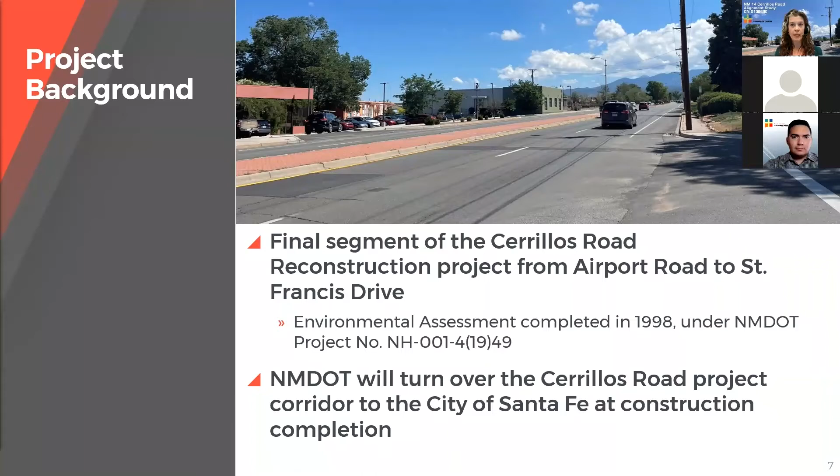This portion of Cerrillos between St. Michael's and St. Francis is actually the final segment of the Cerrillos Road reconstruction effort from Airport Road to St. Francis Drive. The NMDOT completed an environmental assessment in 1998 for these improvements, and construction of the adjacent areas is already complete. Similar to those other segments, the NMDOT will hand off this segment of Cerrillos to the City of Santa Fe at the end of construction.

Next, I'm going to talk a little bit about the purpose and need of the project. The purpose and need is to address deficiencies by improving traffic operations and safety. The project is seeking to update the corridor to meet current design standards, as well as enhance ADA accommodations and multimodal accessibility. The existing four-lane divided roadway will remain, and transit stops and multimodal access and connectivity will be considered.

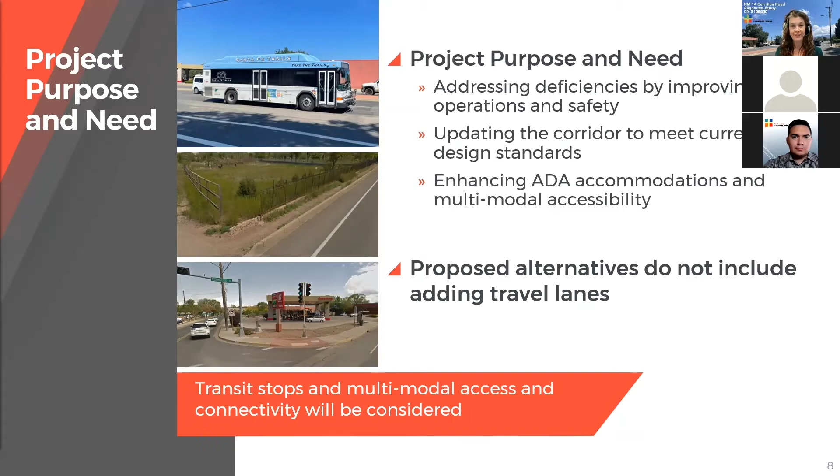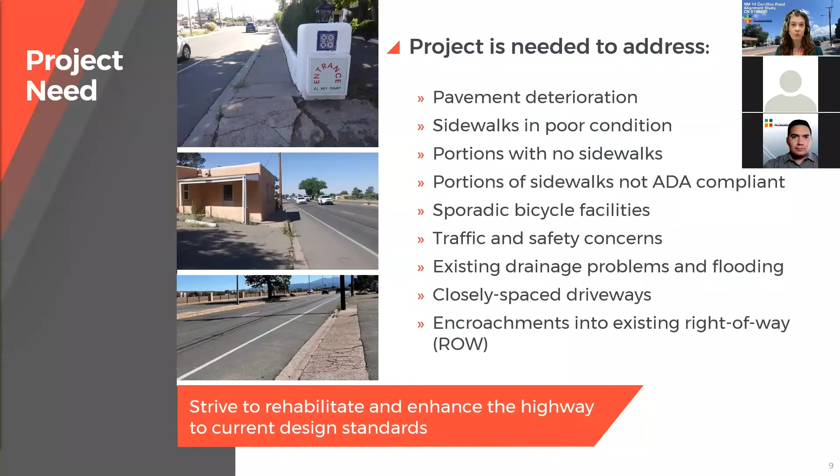The project is needed to address aging and outdated infrastructure. It will enhance and improve the highway so it complies with current design standards. Some of the elements needing to be addressed include pavement deterioration, sidewalks in poor condition, portions with no sidewalks, portions of sidewalks not ADA compliant, sporadic bike facilities, traffic and safety concerns, existing drainage problems and flooding. There are closely spaced driveways, and there are also encroachments into the existing right of way.

Next, I'm going to talk a little bit about the NMDOT's process for developing projects and where we're at in the process for the Cerrillos Road project. Currently, we're in the study phase of this project. This is called Phase 1AB by the New Mexico Department of Transportation. During the 1AB study, we identify what improvements are needed and why, and we evaluate potential options that could be feasible to carry through to design and eventual construction.

After the prior public and business owner meetings held in 2021 in coordination with our stakeholders, we incorporated that input received to advance the study and refine the improvement recommendations. As we are nearing the end of the study phase, which is what we're doing now, we're coming back to you today to present the public with our findings and recommendations. Your input is key to helping us advance the project into environmental studies and preliminary engineering design.

As part of the process, we've been coordinating with our key agencies and stakeholders that manage resources and lands in and around the corridor. This includes City of Santa Fe Indian School, the School for the Deaf, the Santa Fe MPO, and Fairview Cemetery. Next, I'd like to hand it over to Terry Ward, WSP Project Manager, who will discuss our public meeting and stakeholder outreach efforts to date and summarize the input that we've received.

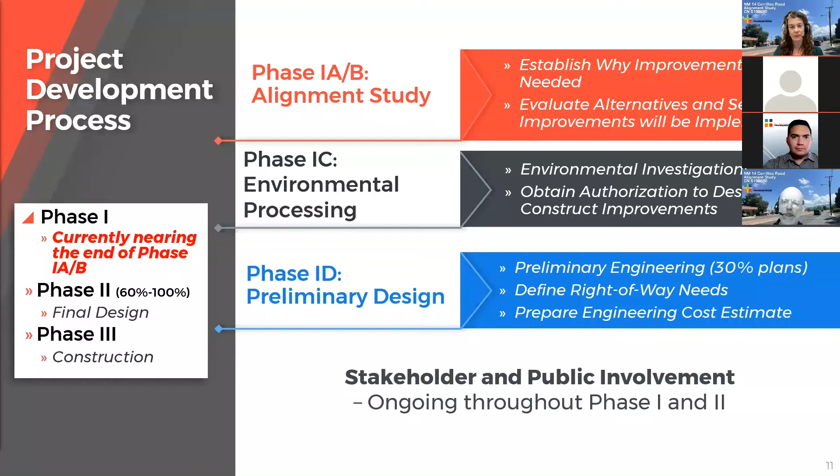Thanks, Jennifer. As Jennifer mentioned, we'd like to talk about the public meeting that we had and some of the stakeholder outreach and efforts that we've received.

Last year in July, we held our Phase 1A, or Alternatives Development, public meeting—our first public meeting. At that time, we had developed a suite of 10 typical sections. In the meeting, we presented that we had screened those 10 typical sections down to 2: one with a 4-foot bike lane and one with a 5-foot bike lane. All of those previous materials are available on our project website that Jennifer featured.

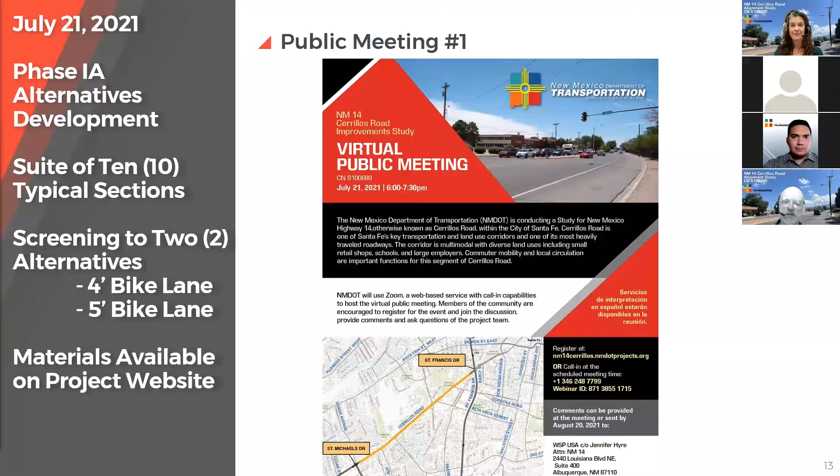For the public meeting, we featured a MetroQuest survey platform. We got great participation—263 people participated. We received 659 comments with 733 data points, a real great portfolio of comments. We also received additional public comments from phone calls and emails. We shared all the comments with New Mexico DOT, City of Santa Fe, and Santa Fe MPO staff, and we developed an overview, or comment summary report, from all of the responses, which we'll feature next.

The first category is improved bike lanes and paths. One recommendation was that during the Phase 1B detailed evaluation efforts, we provide more weighting to the 5-foot bike lane alternative. What's happened is early in Phase 1B, the 4-foot bike lane alternative was eliminated in close coordination with the city and the MPO. I'll talk more about that later.

Another recommendation was to consider green markings for bike lanes. As a team, we've discussed that green markings are not currently planned. However, wider pavement markings for the lane line between the driving lane and the roadway shoulder bike lane will be reviewed in our next phase, Phase 1D, of the project.

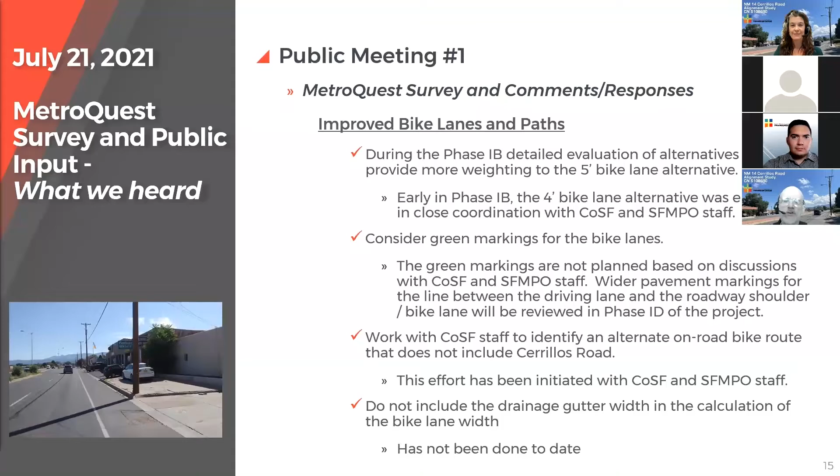Another recommendation was to work with City of Santa Fe staff to identify an alternate on-road bike route that does not include Cerrillos Road for bike movements in this area of the community, and that effort has been initiated with the city and the MPO. Finally, a recommendation to not include the drainage gutter width in calculation of the bike lane width—we have not done that to date.

Another category is improved traffic safety. There was a recommendation to provide more uniform corridor overhead lighting—we'll certainly look at that—and to include overhead lighting at a number of intersections, which will be reviewed as part of our next phase.

Another recommendation was to close the southbound Cerrillos Road turn lane to the New Mexico DOT General Office campus. I'll talk more about that later—we have a concept that actually does that. Another was to implement traffic calming measures such as narrower traffic lanes and landscaping. Those elements are included in our project's typical sections that we've advanced so far.

We reviewed and improved traffic signal timing, which we've done. We'll perform a Railfan traffic signal and access study to determine if a traffic signal is warranted at that location—that's in progress, depending on when traffic conditions allow for updated traffic counts. We'll also implement access management improvements for the businesses across from the Santa Fe Indian School; that's also being looked at as part of the project.

Two recommendations we received a number of comments on that aren't part of the project are to consider red light running cameras in cooperation with the city, and to increase speed enforcement. Those really are not project-specific elements, so we just want to be clear on those, since we did receive a number of comments.

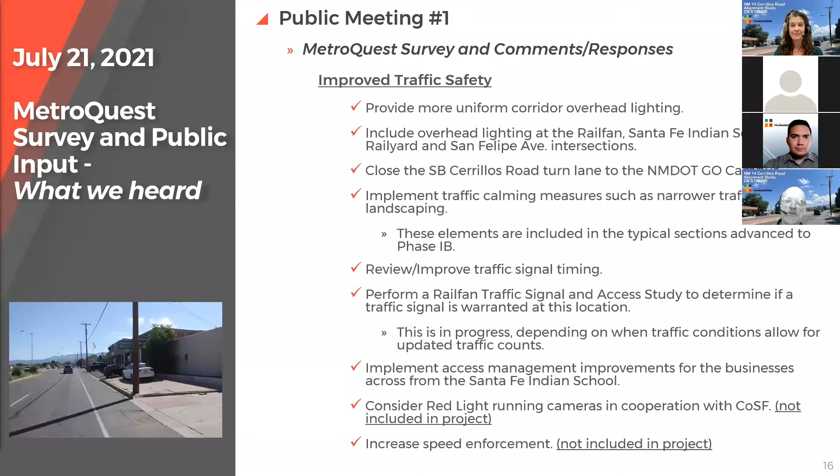Next, traffic flow during construction. We did not receive any recommendations from the responses; however, communications will be key in advance of the construction phase.

Better bike and pedestrian crossings. We received comments to consider crossings of Cerrillos Road at Ashbaugh Park, Railfan, Alta Vista, the Santa Fe Indian School, and other areas where there are long stretches of the Cerrillos corridor without existing crossings. I'll feature those a little bit later in our site-specific improvement recommendations.

Another recommendation was to incorporate planning for a future Railfan Trail underpass as planned by the Santa Fe MPO. We had discussions as a team, and this is not currently included as part of the Cerrillos Road project.

That doesn't mean it can't be done in the future, but just to be clear, it's not included in our current project efforts, though it has been discussed.

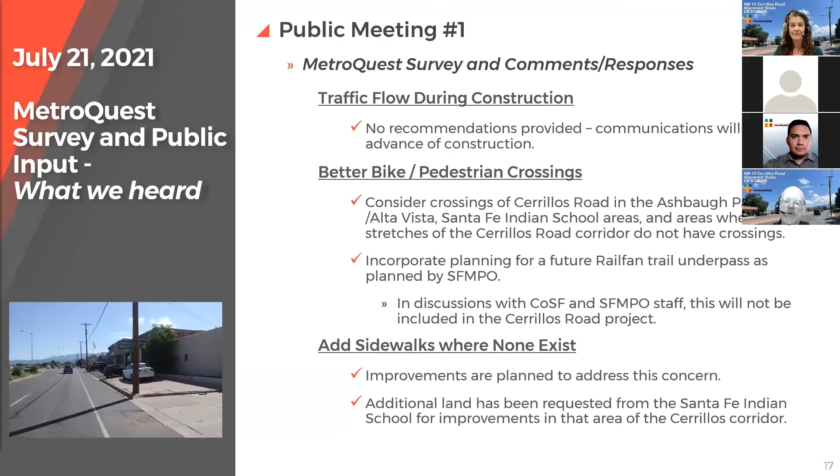Another category is adding sidewalks where none exist. Improvements are planned to address this concern, and additional land has been requested from the Santa Fe Indian School for improvements in that area of the Cerrillos corridor.

Next: how long will construction last? There are no recommendations yet, but again, communication will be very key in terms of the construction phase, the impacts, and the duration.

Another item was removing sidewalk obstructions. Removal of obstructions was recommended and is planned as part of the project - that's power poles, hydrants, and so on. However, those obstructions can remain as long as there's a minimum 4-foot sidewalk clearance. For example, a power pole is no longer an obstruction if there's a 4-foot sidewalk that traverses around it.

The last category in terms of all the great feedback we got was aesthetics. Aesthetics was a low priority in the survey responses, but it remains an area of importance for the project team.

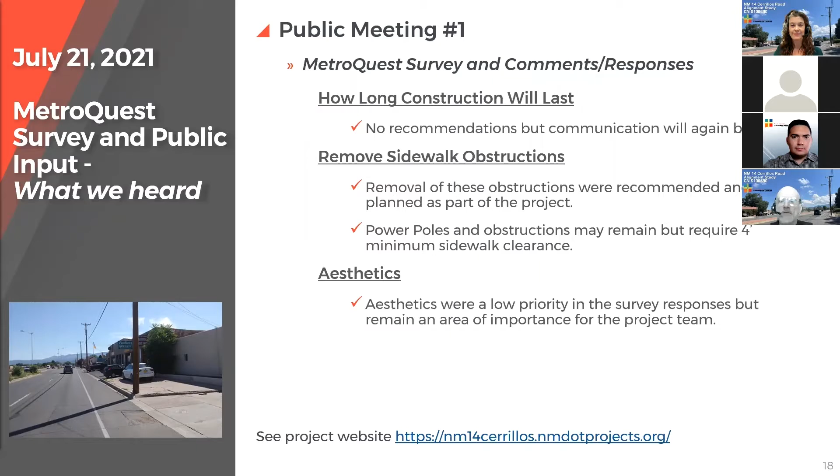So I want to switch gears now to some preliminary recommendations - again, preliminary, not final, preliminary recommendations.

This is option 8, a typical section from our phase 1A. It was presented at the public meeting last year. It's an option that was moved forward. It fits within constrained areas of the corridor, still requires some strips of right-of-way construction, still requires 4-foot sidewalks in some sidewalk-constrained areas, but this makes up the foundation of the recommendations moving forward.

So I want to give some time to talk through this typical section, because everything we show moving forward builds off of this. If I start in the middle of this option 8 typical section, there's a variable 12 to 14 foot median.

14 feet is needed where there's left turn lanes; we can narrow up to 12 in other areas. The driving lanes, the 4 of them, 2 in each direction, have been narrowed to 10.5 feet to gain some width. The bike lane shoulder here is shown as 4 to 5 feet variable. Again, we've dropped the 4-foot shoulder bike lane, and I'll talk more about that in a little bit. There's 2-foot curb and gutter on each side, and then a 5-foot sidewalk.

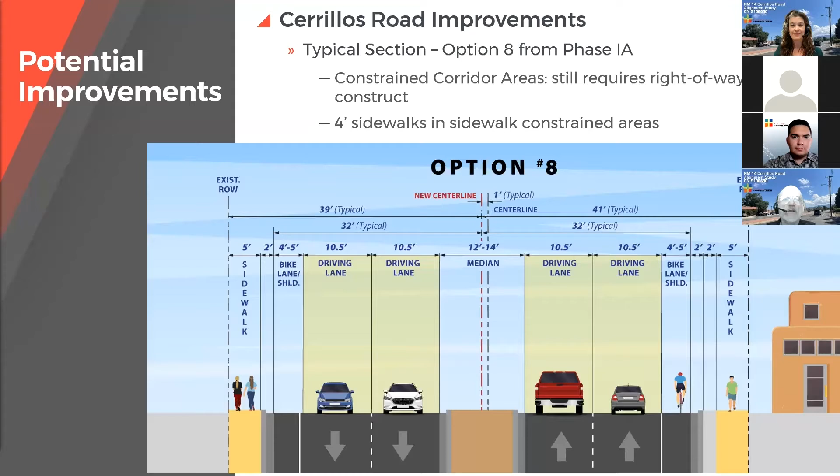Next slide: option 9, then, from phase 1A, we presented where right-of-way may be available. It's the same foundation of the median, driving lanes, and bike lane. It allows, however, where there's some right-of-way availability, a wider sidewalk buffer between the sidewalk and the curbing or the bike lane shoulder. This is where, for example, right-of-way would potentially be available in the Santa Fe Indian School area.

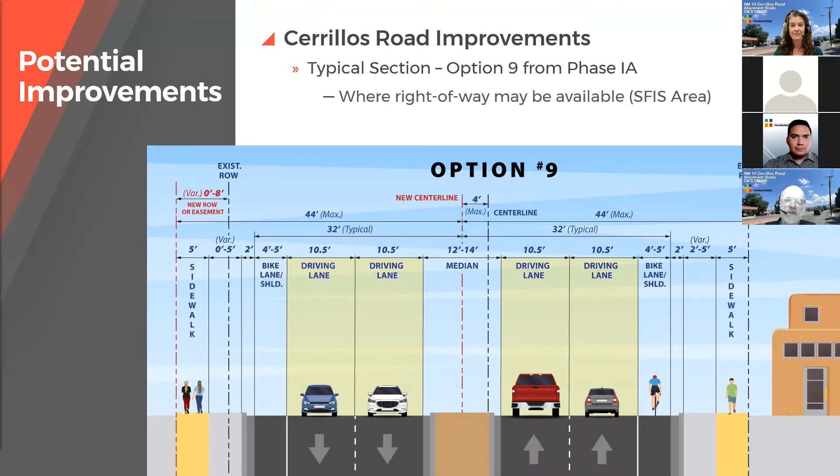So these were the two typical sections from phase 1A that move forward for additional analysis.

So options 8 and 9, which I just presented from phase 1A, were combined into two corridor-wide alternatives with a variable 12 to 14 foot median, 10.5 foot driving lanes, 4 or 5 foot bike lanes/roadway shoulder, 5 foot sidewalks where feasible, 4 foot minimum in constrained areas, and wider sidewalk buffers where right-of-way is available, like for example the Santa Fe Indian School. Those options are on the website from the last public meeting.

We presented what we called an option 8 4-foot bike lane and 5-foot bike lane. Again, those were all materials presented in 1A, the last public meeting, and have been on the website for some time now. Subsequently, a study working group was formed in phase 1B, our detailed analysis phase, to review the phase 1A alternatives and public feedback.

So all of the alternatives that I've talked about, all of this great feedback, we formed a study working group to review it. It included the New Mexico DOT, Department of Transportation, City of Santa Fe, and Santa Fe MPO staff, and we had a series of meetings to really steer or drive the phase 1B efforts.

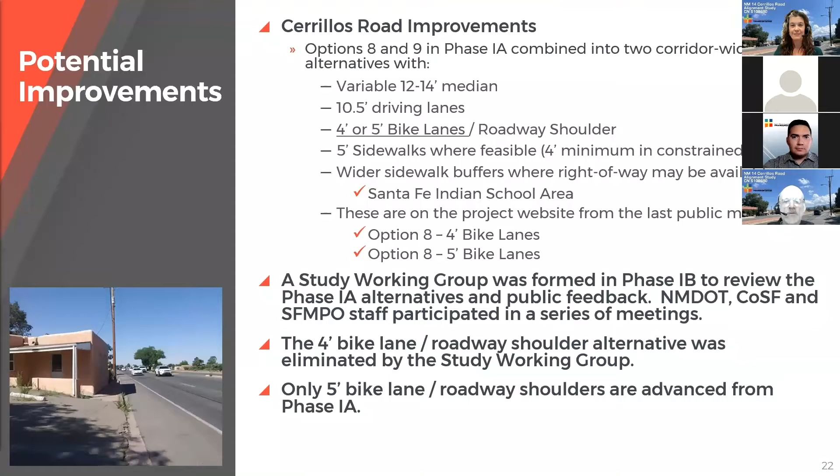As I mentioned, the 4-foot bike lane/roadway shoulder alternative that I talked about was eliminated early on by the study group. That means only 5-foot bike lane/roadway shoulders are advanced from phase 1A for further analysis. The study working group also added 6-foot sidewalks for consideration in areas where feasible.

4 foot or 5 foot sidewalks may still be required in constrained areas, but now we have a 6 foot sidewalk alternative as well, plus a 5 foot bike lane alternative with 5 foot or 6 foot sidewalks. That information is on the project website and is proposed in 1B for further analysis. So again, it's a 5 foot bike lane or roadway shoulder with 5 foot or 6 foot sidewalks. That's the real variable we're looking at now, and all of that information is on the project website.

The decision on where 6 foot sidewalks will be provided, if any, will be made in phase 2 preliminary design. The analysis for that decision, between 5 foot and 6 foot sidewalks, will review costs, right-of-way, environmental aspects, and will consider public feedback. We really encourage you to provide your feedback. Cost and impacts of right-of-way needs for the sidewalks will need to be carefully considered in the analysis. All recommendations are subject to right-of-way availability, cost, and environmental clearances.

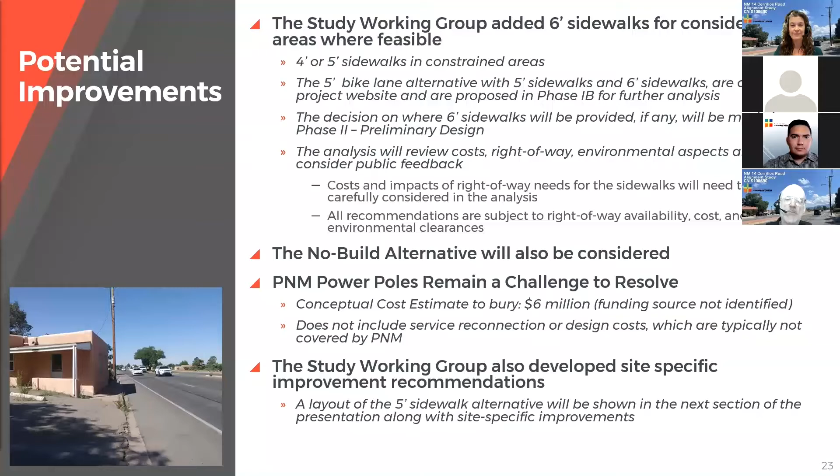The study working group also developed site-specific improvement recommendations, which we will feature shortly. A layout of the 5 foot sidewalk alternative will be shown in the next section of the presentation, along with the site-specific improvements that we promised would be presented at the last public meeting last year in phase 1A.

Now let's talk about corridor and site-specific improvement recommendations. The typical section, to recap: a variable 12 to 14 foot median, 10.5 foot driving lanes, all 4 of them, 5 foot bike lanes or roadway shoulder (4 foot has been eliminated for that), and 5 foot or 6 foot sidewalks where feasible, with 4 feet minimum in constrained areas. Again, sidewalk width of 5 or 6 feet is to be determined in phase 2 final design, and we're asking for a lot of feedback on 5-foot versus 6-foot sidewalks in the corridor. Wider sidewalk buffers will be provided where right-of-way may be available, for example, the Santa Fe Indian School area.

For the 5-foot sidewalk alternative, site-specific recommendations are next. The 6-foot sidewalk alternative information is on the project website. So we're going to show the 5-foot sidewalk version here.

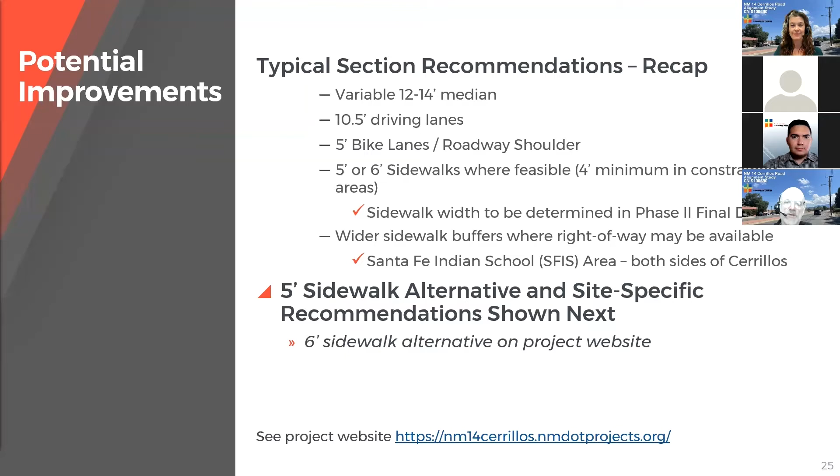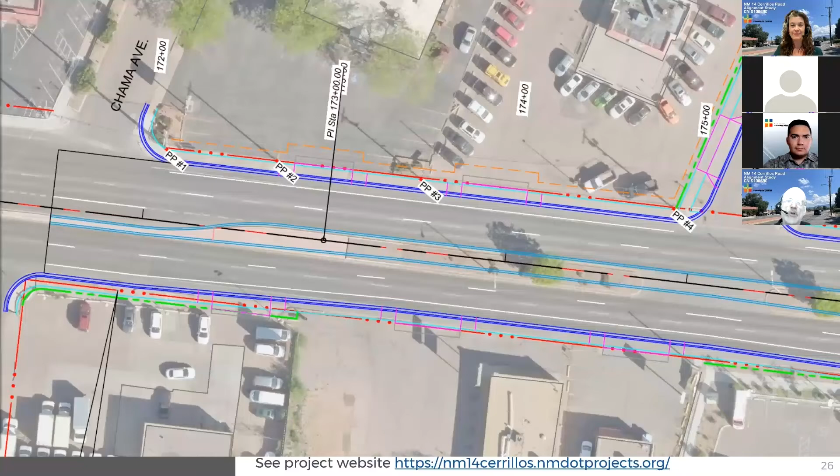The dark blue on both sides of Cerrillos is curb and gutter, and in the median, the lighter blue shows the center median. As an example, the median is closed at Chama Avenue. There's no means to take a turn from, if I can call it, northbound Cerrillos — I'll speak of Cerrillos running north and south for this presentation. So northbound Cerrillos will not be able to make a left turn onto Chama, and conversely, people on Chama Avenue will not be able to make a left turn out; they'll have to make a right. You can see in the background where there was an existing opening that's closed as part of this graphic. I hope this helps if you pull up that graphic and walk through the corridor to look at the specific improvements — I'd encourage you to take your time and look at the entire corridor.

So this is the 5-foot sidewalk alternative. I want to walk you through the corridor and show you what the sidewalk improvements will look like. In turquoise is the 5-foot sidewalk, and in red is the 6-foot sidewalk. On Chama and San Felipe, we're matching into wider sidewalks as they approach Cerrillos.

There's none on this sheet, but in yellow is 4-foot sidewalks. Next, please.

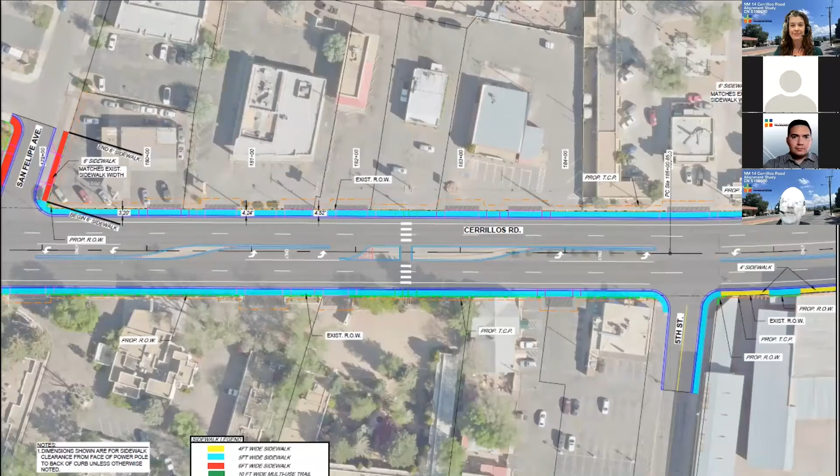This particular one moving north shows you again the 5-foot sidewalks. We start to see some 4-foot sidewalks on the northeast side of 5th Street because of buildings that encroach into the right-of-way. In order to fit a sidewalk in there, we have to narrow it up to 4 feet. So we start to see that in this particular layout.

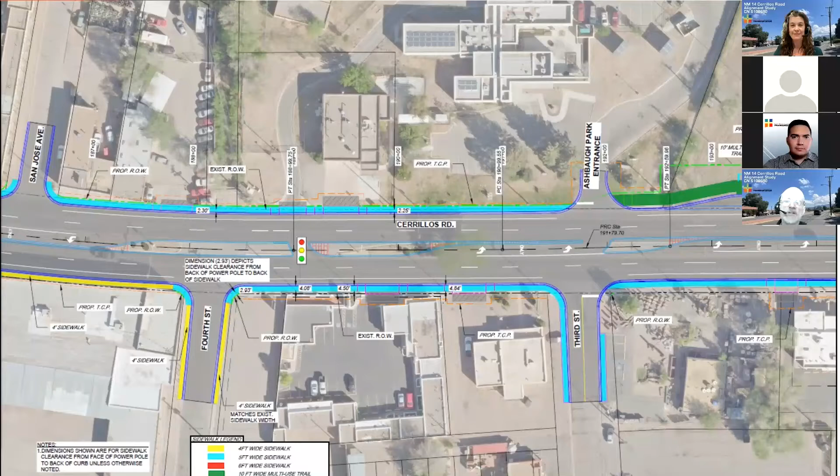Here we see some more of the 4-foot sidewalk and the pieces of turquoise being 5-foot again. And then in the upper part, past the Ashbaugh Park entrance, we start to see a green 10-foot multi-use trail. I'm going to talk about that a little bit later on in another slide, but there are some sections of 10-foot multi-use trail facilities in the corridor.

Next slide, please. You can start to see here at 2nd Street, then the end of that 10-foot multi-use trail. It connects Ashbaugh Park and 2nd. I'll talk about that a little bit more later.

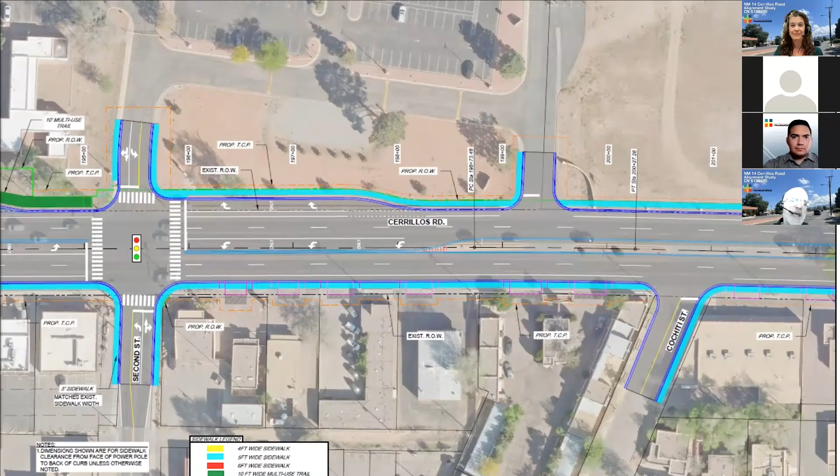I want to talk here about 2nd Street because this slide is the one that'll show it. We've introduced left turn lanes on both sides of 2nd Street as they approach Cerrillos, that signalized intersection. We narrowed up the lanes, but it was really important from our traffic operations study to add the left turning lanes at 2nd. So I just wanted to show that we've done that.

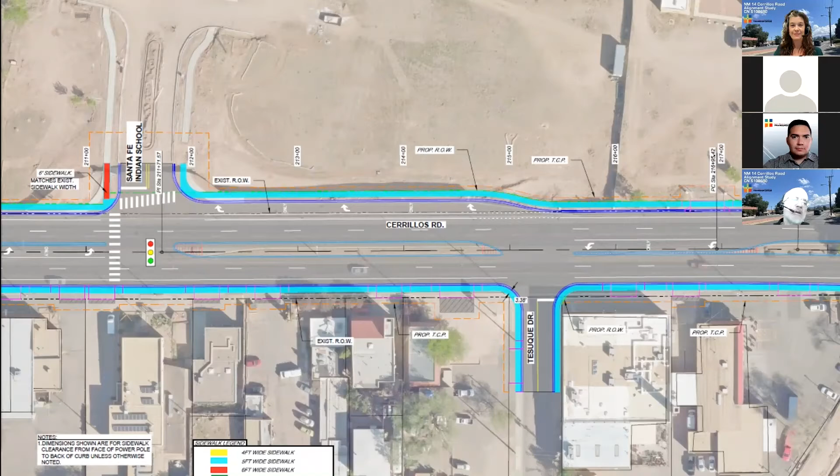Here we get to the new Santa Fe Indian School. We're proposing a permanent signal there. You can see these sidewalks there. We're showing crossing Cerrillos on one side at that location to help, we believe, with pedestrian crossings and the safety of pedestrian vehicular movements there.

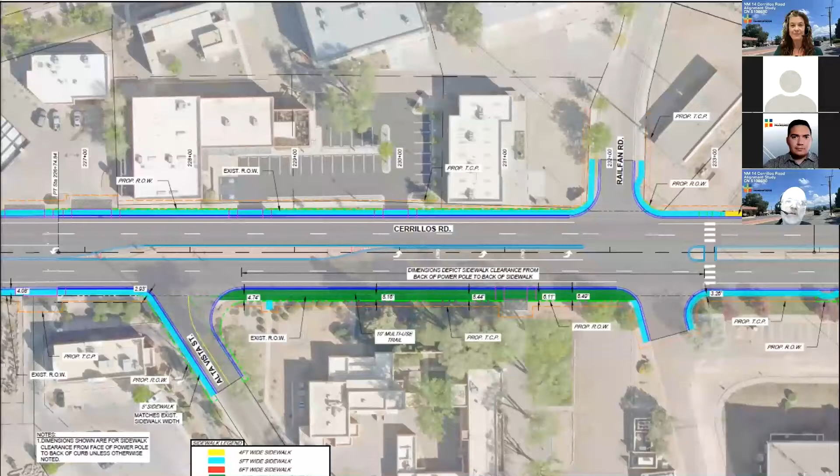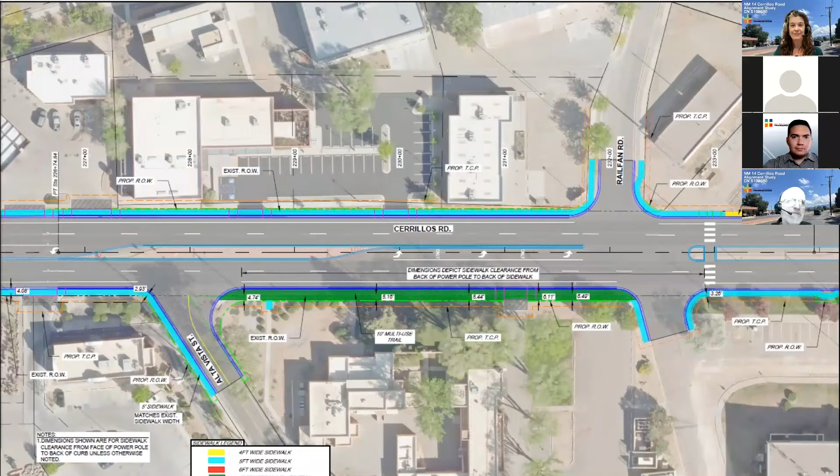Next. Here we're showing the Alta Vista Railfan area, again a 10-foot multi-use trail here between Alta Vista and Railfan. I'll talk a little bit more about that later. And then you see a 4-foot sidewalk piece on the west side, north of Railfan. That's because of the Fairview Cemetery. The existing fencing or railing there encroaches onto New Mexico DOT right-of-way slightly. So to accommodate that encroachment, in lieu of moving that, we have to narrow up the sidewalk in that area to 4 feet.

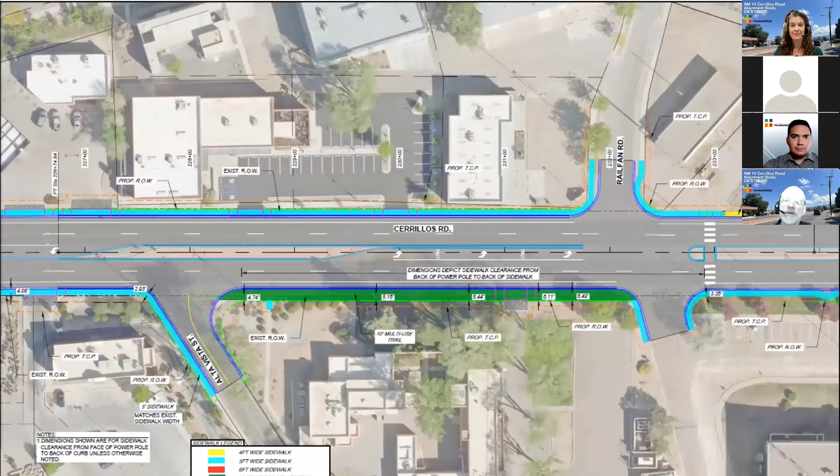Next. And you see where that 4-foot ends. We get back to 5 feet up through Cordova.

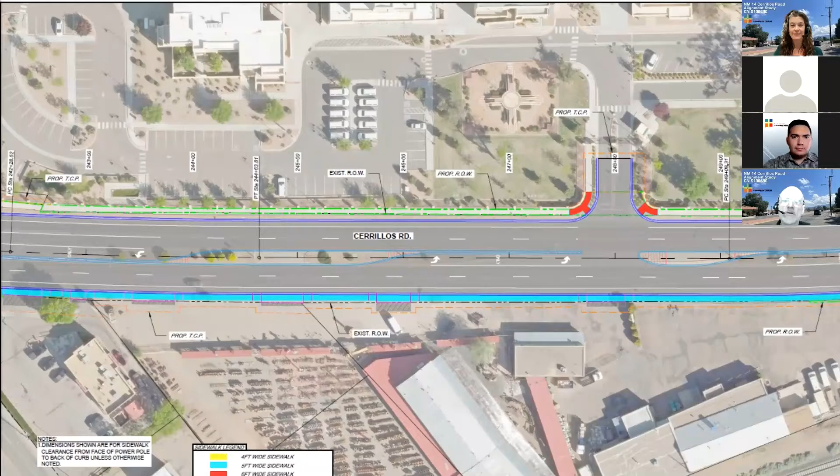Next, please. And here you see some 5-foot turquoise on the east side. The existing sidewalk for the School for the Deaf actually is 6 feet already, so we're not showing any improvements along there. Basically putting in some pedestrian ramp improvements you'll see in red there, and allowing the existing sidewalk along the School for the Deaf to stay in its existing conditions.

So again, just walking you through the corridor so you can see what a 5-foot sidewalk layout looks like, that there are some 4-foot areas. Even with a 5-foot sidewalk, there could be some power poles or obstructions where it's a 5-foot sidewalk, but it's actually 4 foot of space or room to use the sidewalk because of a potential power pole or hydrant or something like that, just to be clear on that.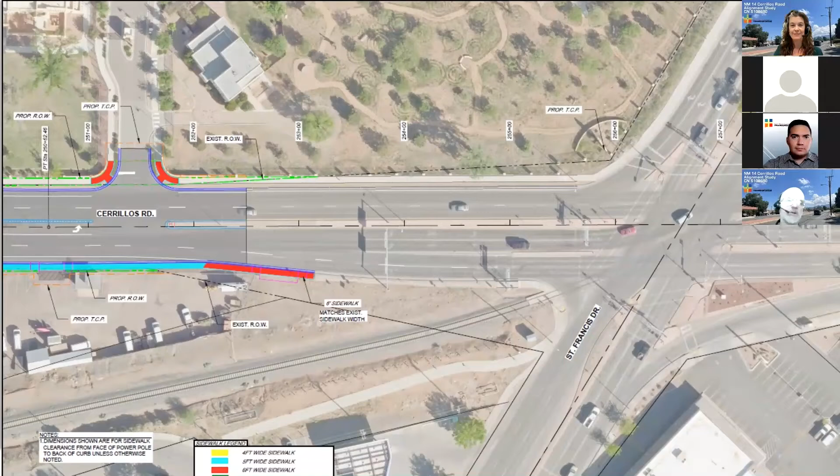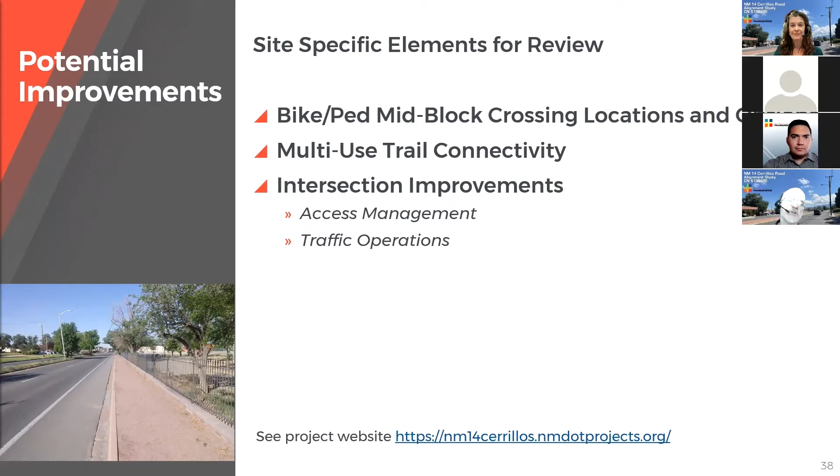Okay, next slide. So let's switch gears now to some site-specific elements for review. I want to talk about bike pedestrian mid-block crossing locations and some options, multi-use trail connectivity like I briefly mentioned in the layout for the sidewalks, and then some intersection improvements, just to show you some access management and traffic operations improvements that we're recommending.

Next. So to start with, the section of Cerrillos between St. Michael's and the 2nd Street area was highlighted in feedback as a long stretch of Cerrillos with little to no crossing opportunities. It was recommended we look at that segment and try to footprint the location for a pedestrian bike crossing. The bad news is we didn't find a location that logically connected up to some City of Santa Fe infrastructure, meaning sidewalk or bike trail connections. But the good news is at about the midpoint between San Felipe and the 5th Street area, we found a location where we believe we could accommodate a crossing.

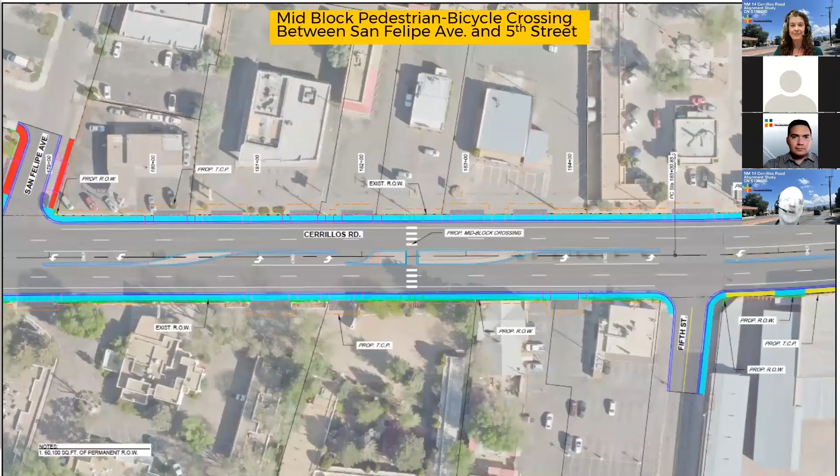We're showing some pavement markings, that's just to graphically depict the markings. We will determine the actual, if it's marked, how it's marked, is there any type of signing or signalization, flashing signalization. Those type of infrastructure discussions will be taking place in our next phase. But we did show some markings here just to help graphically depict the location. So that's one location that has been recommended, and we think we found a location to accommodate that.

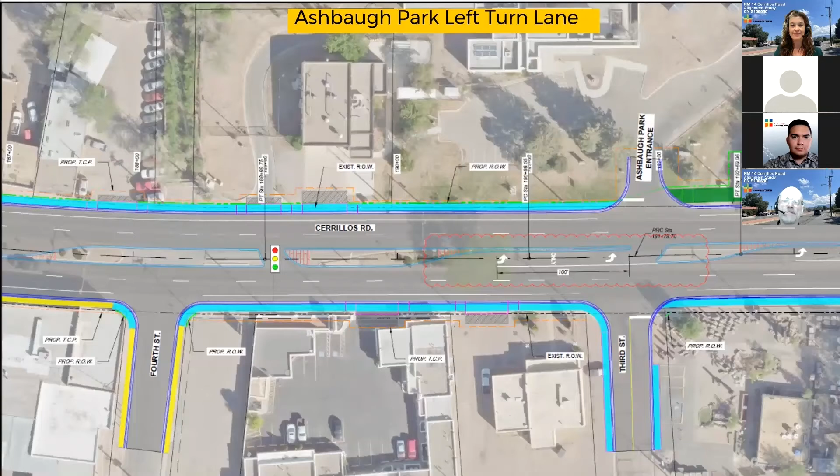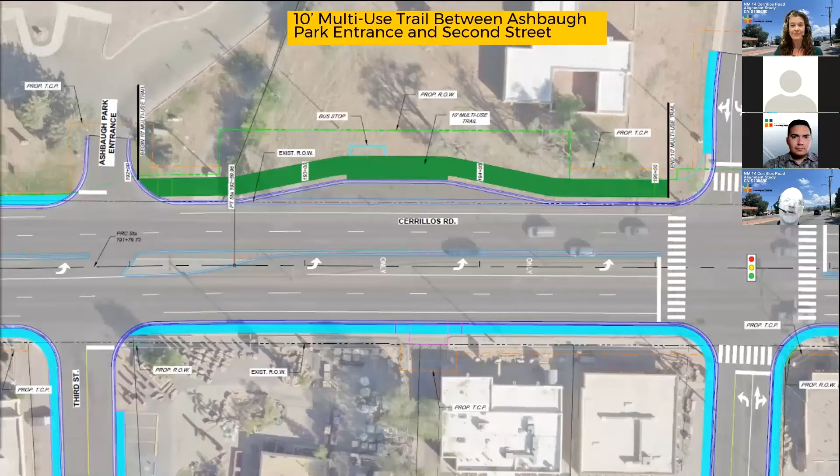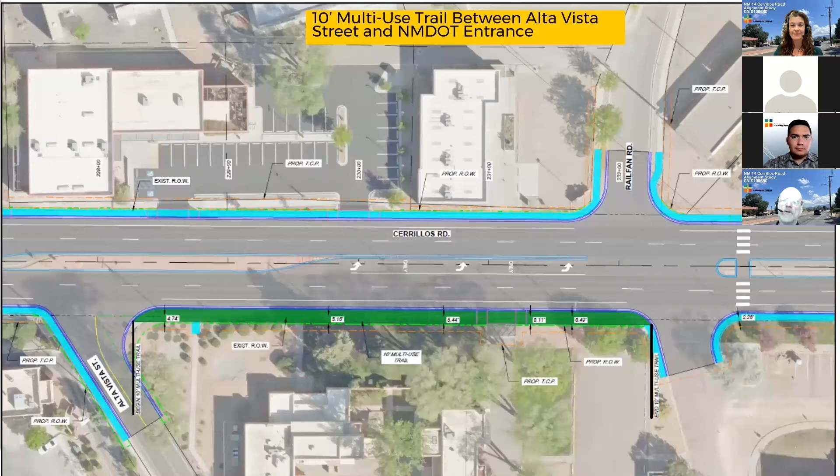This is a 10-foot multi-use trail between Alta Vista and Railfan, to help connect the rail trail and the Acequia Trail for pedestrians and bicycle users crossing the Railfan area. We looked at using the opposite side of Cerrillos to connect Railfan to Baca, but with all the businesses and potential conflicts with vehicles, we didn't feel that was the safest solution. So bringing people down to Alta Vista, providing a 10-foot multi-use trail up to the New Mexico DOT general office entrance area, combined with a potential crossing at Railfan, we felt was the best and safest solution. That's what we're showing here.

This is the mid-block crossing at Railfan. We're showing pavement markings just to depict the location. To accommodate this, as mentioned in the public feedback, we're recommending closing the southbound left turn lane entrance to the New Mexico DOT general office. If you look closely at the background mapping, you can see where the existing turn lane is and that we're closing it. So this would be a combined multi-use trail connecting Alta Vista to this crossing, providing this location for bikes and pedestrians to cross Cerrillos. The actual signing, signalization, or flashing system installations accompanying this crossing would be determined as we move forward in preliminary and final design, with feedback from the public, the city, MPO, and our other partners.

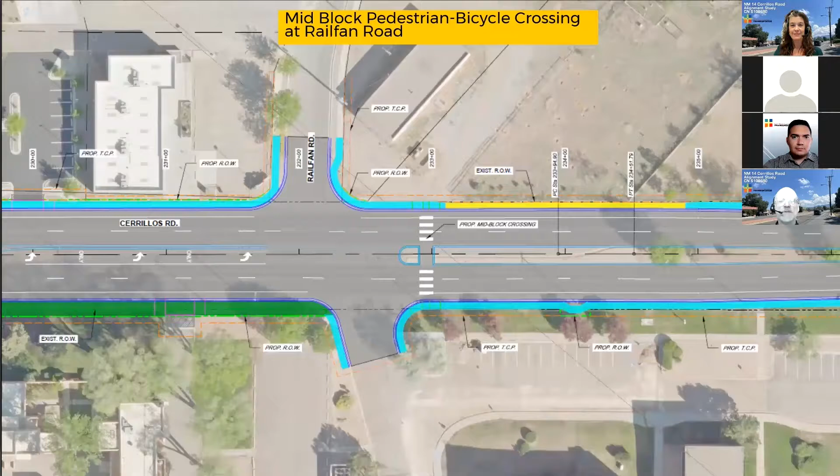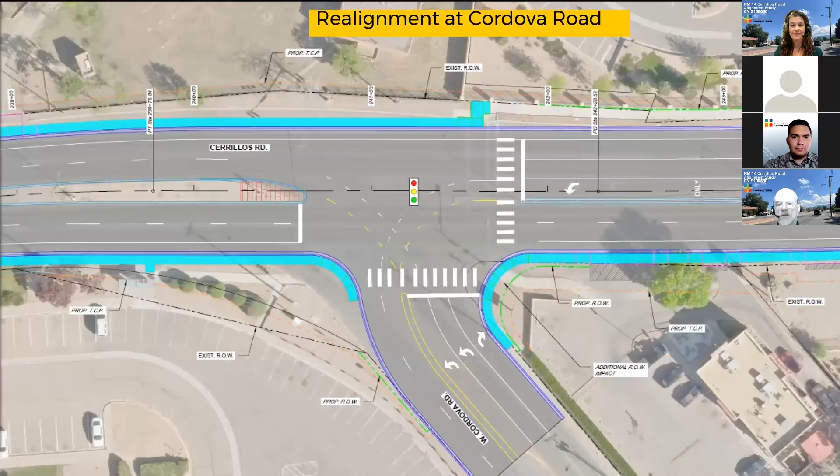We're featuring a realignment of Cordova at its intersection with Cerrillos. We received several concerns from feedback: one being the distance pedestrians had to cross on the east side of Cordova, and the other being the speed at which drivers northbound on Cerrillos making a right turn onto Cordova would travel, since that curvature allows a fairly higher rate of speed. So we've realigned the connection for two purposes: first, to soften or dampen the speeds for northbound Cerrillos drivers turning right onto Cordova; second, to shorten the pedestrian crossing distance for those crossing that leg of Cordova from the New Mexico DOT GO Campus area to the opposite side.

Here we're showing a New Mexico School for the Deaf left turn lane into their northerly, or what they featured as their theater entrance. They have a lot of events, and our feedback from the School for the Deaf in the theater area is that it queues or backs up traffic on Cerrillos. So they requested we look at a left turn lane at this particular location. We've done that, and we're showing where that would be footprinted. In order to do that, however, we need to close an existing southbound left turn lane on Cerrillos to the businesses on the east side. So to be clear, this new northbound left turn lane to the New Mexico School for the Deaf northerly or theater entrance would close an existing southbound left turn lane for opposing traffic in the opposite direction.

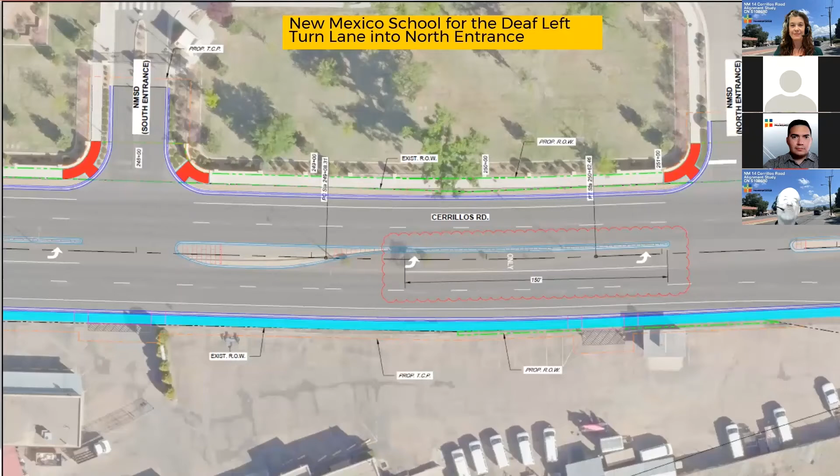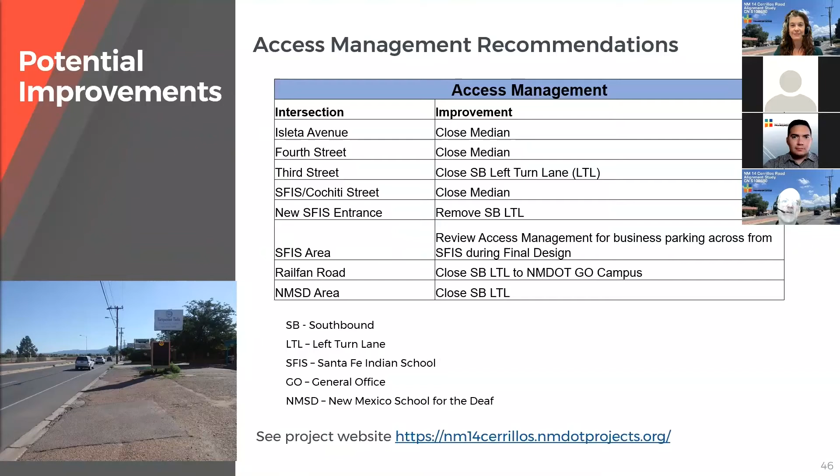I talked about featuring some access management recommendations, so I'll run through these. At Isleta Avenue, we're closing the median, doing the same at 4th. The recommendation shows closing a southbound left turn lane at 3rd, closing the median at the Santa Fe Indian School Cochiti Street location, removing a southbound left turn lane at the new Santa Fe Indian School entrance, and reviewing access management for business parking across from the Santa Fe Indian School, which we'll do during final design. At the Railfan Road area, closing the southbound left turn lane to the New Mexico DOT General Office campus, as I just showed you, and in the School for the Deaf area, closing that southbound left turn lane, again as shown in the previous slide. Those are the access management recommendations.

Traffic operations recommendations: At San Felipe, lengthen the Cerrillos northbound and southbound left turn lanes. 5th Street, do the same. Ashbaugh Park, lengthen the Cerrillos northbound left turn lane. 2nd Street, lengthen the Cerrillos northbound and southbound left turn lanes, add eastbound and westbound left turn lanes as I talked about previously, and add a southbound right turn lane on Cerrillos at 2nd. Navajo Drive, lengthen the southbound Cerrillos right turn lane. New Santa Fe Indian School entrance, signalize it and lengthen the Cerrillos northbound left turn lane. Tesuque Drive, lengthen the Cerrillos southbound left turn lane.

Baca Street I've highlighted in yellow because I'll talk about it on the next slide—improvements there really aren't possible due to right-of-way constraints. At Railfan, lengthen the Cerrillos northbound left turn lane and perform a signal warrant study, which is planned for both, but I'll talk more about this one on the next slide. At Cordova, realign the westbound approach as shown, add a westbound dual left turn lane to help traffic capacity and operations there, and lengthen the Cerrillos southbound left turn lane at Cordova. At the New Mexico School for the Deaf southerly entrance, lengthen the Cerrillos northbound left turn lane and close the Cerrillos southbound left turn lane, and at the School for the Deaf north entrance, lengthen the Cerrillos northbound left turn lane. That's a lot of information.

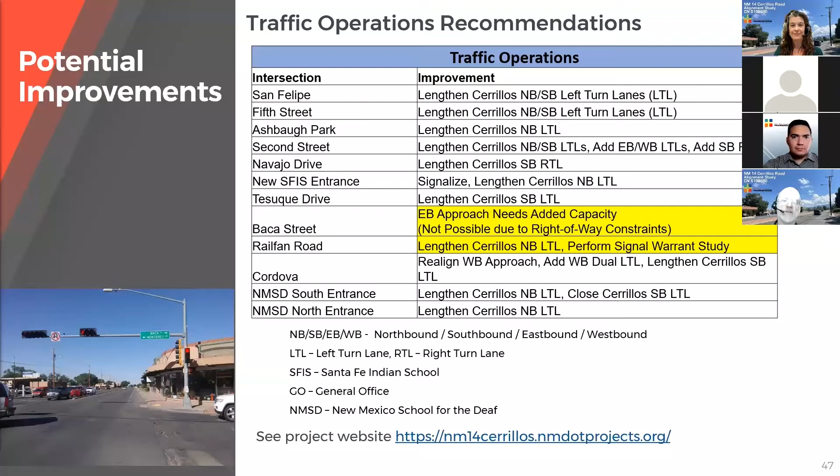I talked about it quickly—I just wanted to give you a feel for the lengthening of the turn lanes and the traffic operation recommendations that are also included as part of our study phase, in terms of our preliminary recommendations.

I talked about signal system coordination and timing adjustments. We've looked at the signal system coordination and timing, giving Cerrillos Road what we call priority in terms of traffic operations. There is some level of improved traffic flow we can accommodate, but not a high level, by enhancing the coordination of the signals and timing. At Baca Street, the eastbound approach has capacity challenges, and we're not able to resolve those because of the constrained right-of-way on that eastbound approach—we're just not able to add lanes there. There are also some traffic capacity challenges at Railfan, partly due to existing traffic circulation. For example, Flagman Way is one way, and it's really outside the scope of the Cerrillos Road project to reach out that far and change circulation on Flagman Way to try to resolve some of those capacity issues.

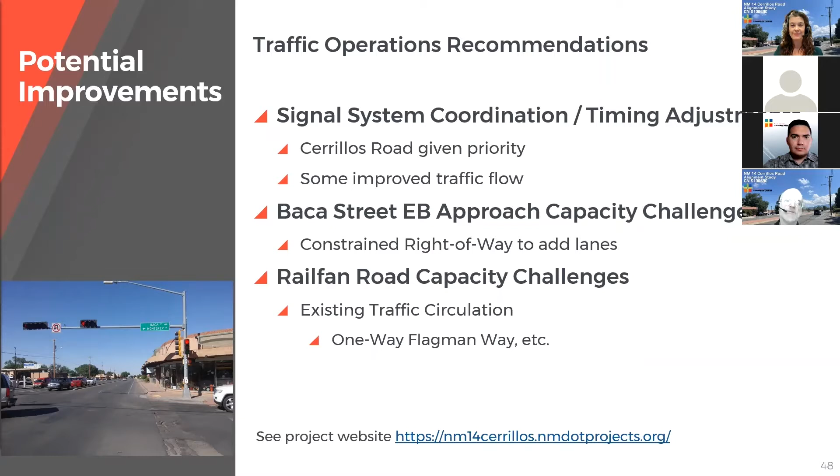Now switching gears to existing drainage conditions. The existing drainage conditions in the Cerrillos Road corridor have 3 drainage outfalls where drainage can leave or exit the corridor: one being the New Mexico School for the Deaf outfall, with some outlets in that area; two being the Baca Street outfall, with outlets there as well; and three being the Ashbaugh Park outfall area, where there are also some outlets.

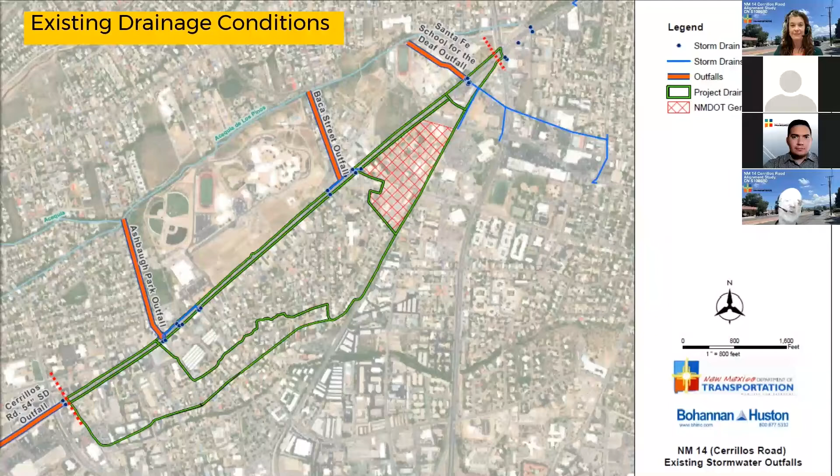There is no storm drain running the length of Cerrillos, bringing drainage down Cerrillos. The hatched area is the New Mexico DOT general office area. One more point about the existing drainage conditions: the urban, developed areas highlighted in green on the east side of Cerrillos, south of the DOT general office area, contribute roughly 70% of the drainage that Cerrillos Road picks up. So that's a major contributor to Cerrillos Road—residential and commercial build-up east of Cerrillos, highlighted in green on the screen.

Drainage improvements include adding a storm drain trunk line in Cerrillos, tying into the existing system near St. Michael's, which has a 10-year drainage design capacity. We'll eliminate the Baca Street outfall I showed you, based on feedback from the City of Santa Fe and Acequia Madre staff we met with, and a field review our team conducted. So again, eliminate flows to the Baca Street outfall. There will be no increase to the New Mexico School for the Deaf outfall, and we're striving to reduce or perhaps eliminate Cerrillos flows to that outfall as well.

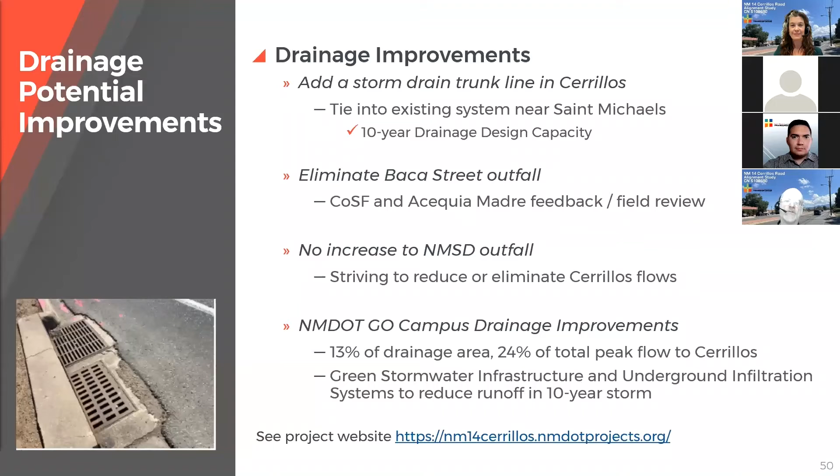To accommodate these goals, New Mexico DOT has moved forward with a GO campus drainage improvement effort. That area receives roughly 13% of the drainage area of Cerrillos but contributes 24% of the total peak flows to Cerrillos. We're looking at green stormwater infrastructure and underground infiltration systems to reduce runoff to Cerrillos.

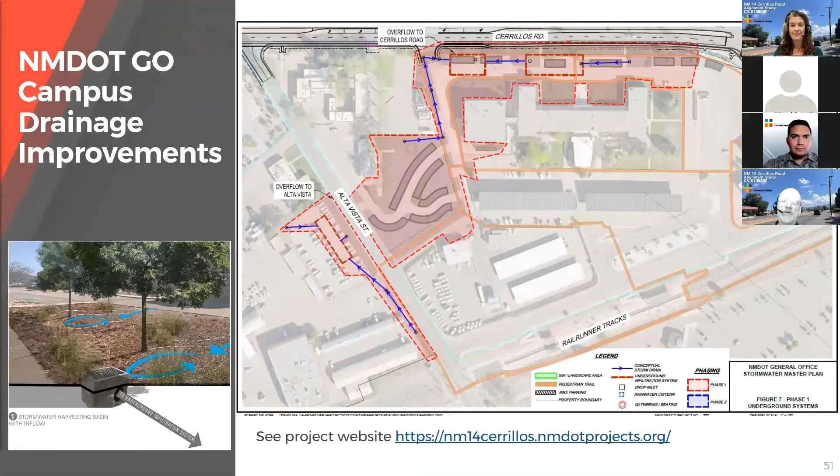This slide shows the NMDOT general office campus area, with some underground drainage retention facilities proposed to be built there to help manage Cerrillos drainage.

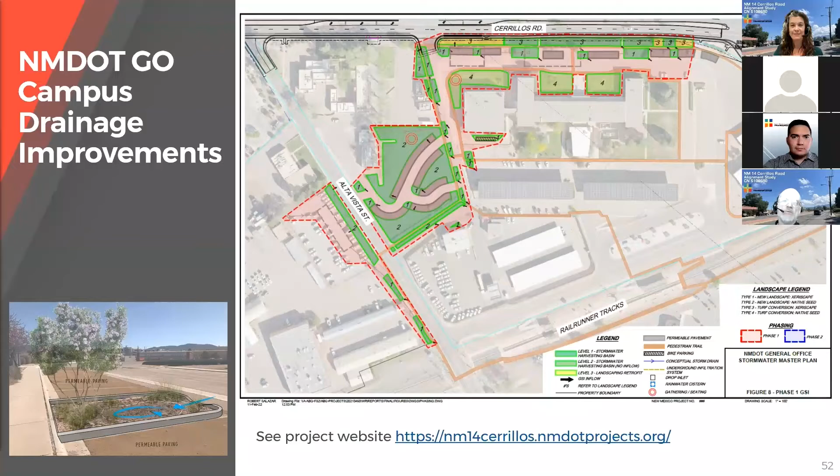This one shows some above-ground surface treatments, again to help with retention of drainage from Cerrillos Road.

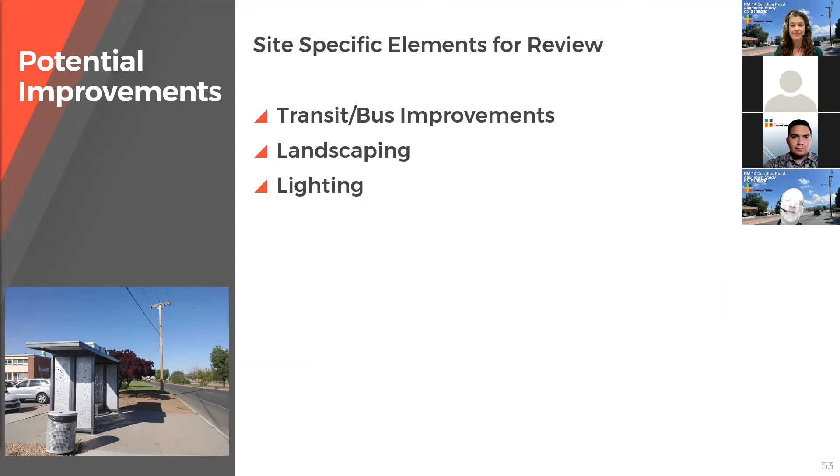Site-specific elements include transit bus stop improvements, landscaping, and lighting. This slide shows some landscaping and bus stop locations.

These details might be a little hard to see here, but these materials are available on the project website—I just wanted to show you they exist. This slide shows some bus stop locations and shelter locations throughout the corridor.

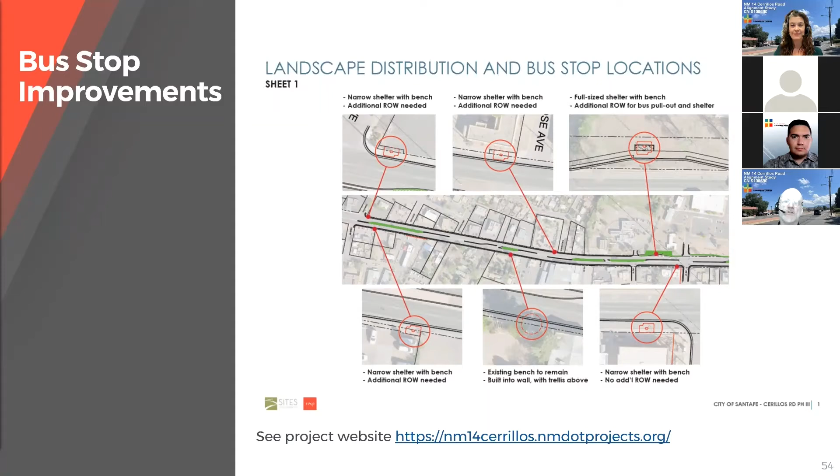This one shows some additional locations. At the top, if you go online and zoom in, it shows a full-size bus shelter, 14 feet wide, and a narrower 10-foot wide shelter. These slides show specifically where narrow shelters are proposed versus full-size shelters throughout the entire Cerrillos corridor. We've done a lot of work with Santa Fe Trails in developing these.

I believe this is the final bus stop location slide.

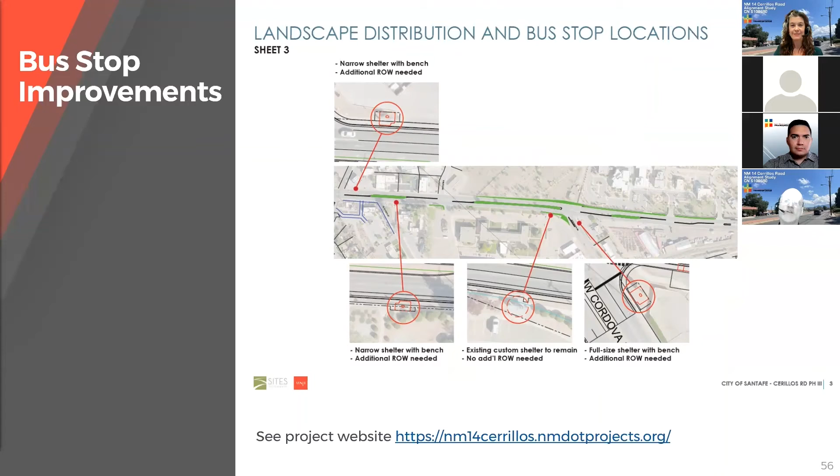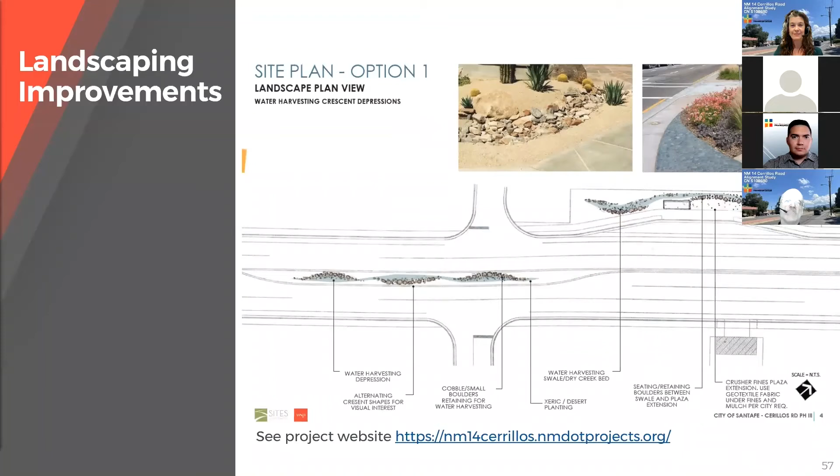Now some landscaping options. This one shows an option with water harvesting crescent depressions, materials which are also on the website, used to retain stormwater and harvest some of that retention. Here's another view of the same option—the water harvesting crescent depressions.

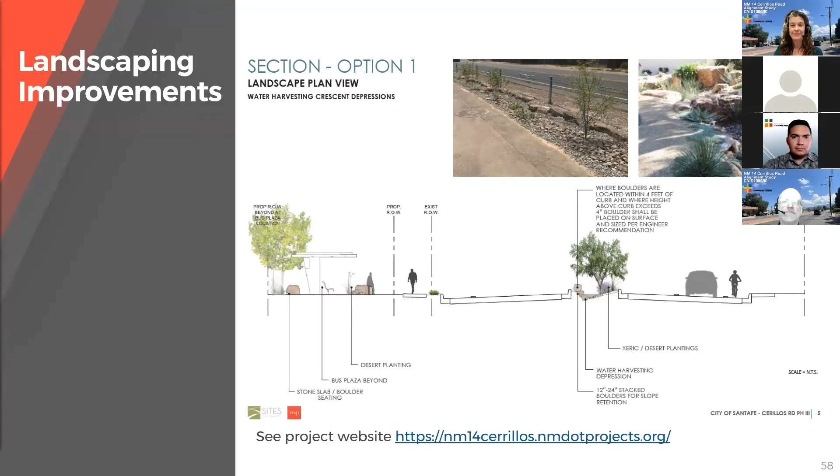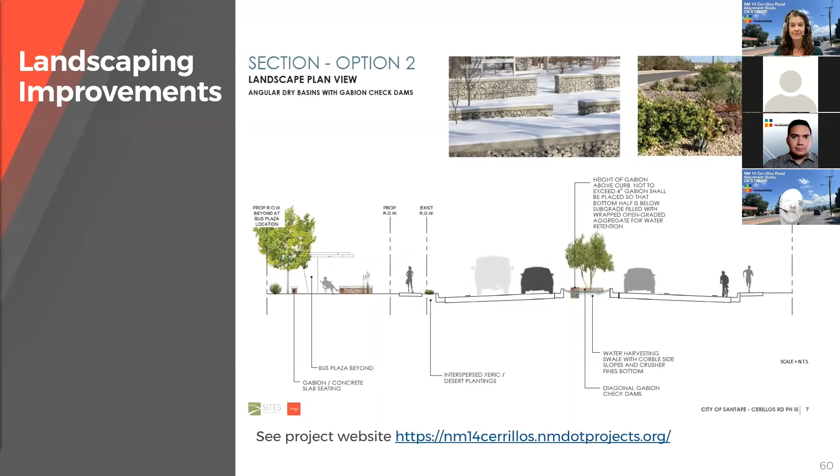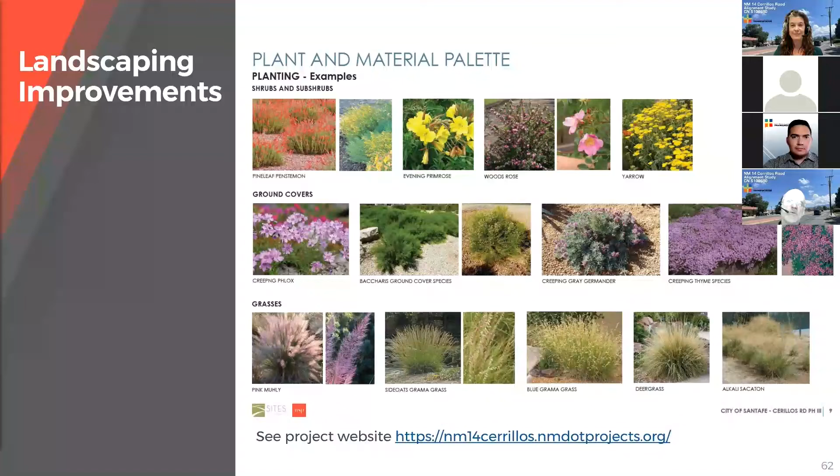Next, we have some material palettes of planting—a suite of potential materials and plant species that are at least preliminarily recommended. You can go online and look at those and provide comments or feedback. There's at least one more of these, showing similar types of materials that we're proposing as potential alternatives at this point in our efforts.

In terms of lighting, the goal will be to move the lighting poles to the outside and avoid any in the median areas, due to safety concerns and difficulties maintaining light standards there. We'll strive to move lighting to the outside, working closely with PNM if there are power poles in the corridor.

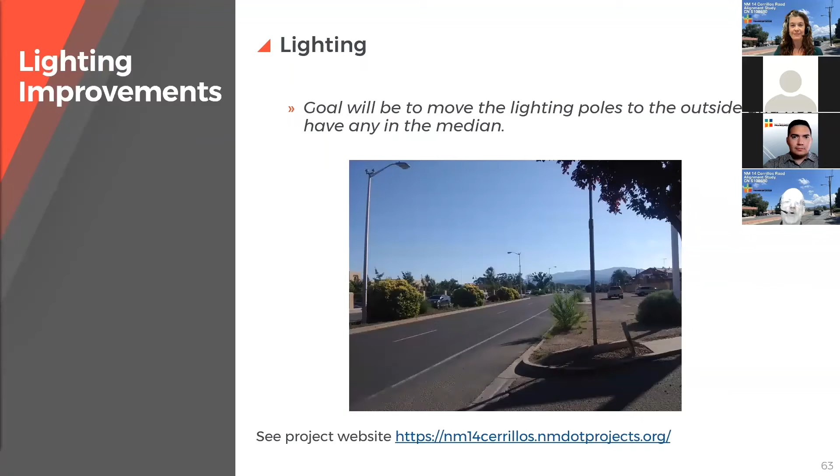With that, I'll turn it back to Jennifer. Thanks, Terry. So I'm going to talk a little bit about some of the environmental, right-of-way, cost, and phasing aspects of the project.

As part of the alignment study, we've identified other key considerations and constraints to advancing this project. There are numerous historic and archaeological properties along the project corridor, and our environmental studies will be looking closer at these properties in order to minimize potential impacts to important cultural resources in the corridor.

The project will also be requiring small strips of right-of-way to be acquired, whether those are permanently acquired or temporarily needed for construction. Terry talked a little bit about those. The locations and the specific amount of right-of-way needed will be determined as the engineering design advances.

Currently, the estimated cost to construct the entirety of the project is around $30 million. As mentioned earlier, construction will be phased due to funding availability, with phase one being from St. Michael's to Tesuque Drive. This segment has about $16.5 million of funding programmed, and will likely include drainage improvements at the DOT General Office campus.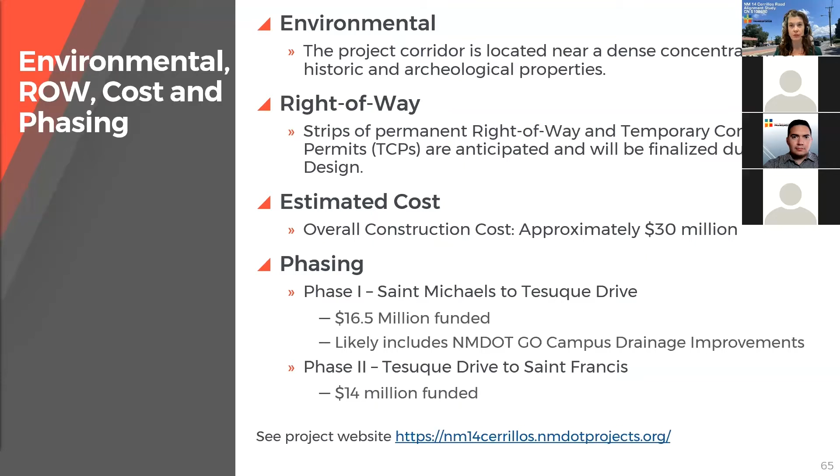Phase two then will be from Tesuque Drive to St. Francis, which currently has $14 million of programmed funding.

Next, I'm going to talk about our schedule, where we're at in the project, and our next steps. The project study began summer 2020 with the Phase IA/B study and collecting data to develop conceptual alternatives that were presented at the study phase public meeting in July 2021.

We also had a business owner meeting at that same time, and we're having our second public meeting today. We anticipate completing the study by July-August 2022, at which point NMDOT will have a recommended alternative to advance into initial engineering and environmental analysis.

That will begin this summer and carry through into fall of 2022. We will incorporate the feedback received from this public meeting and during our 30-day comment period, and continue to advance the project. We do plan to have another public meeting later this year after we have further refined and advanced a preferred option.

We expect to finalize design by the end of 2023, start of 2024, with construction of the first phase starting as soon as spring or summer 2024. As mentioned, the construction will be phased, and phase two construction will occur immediately after phase one is complete.

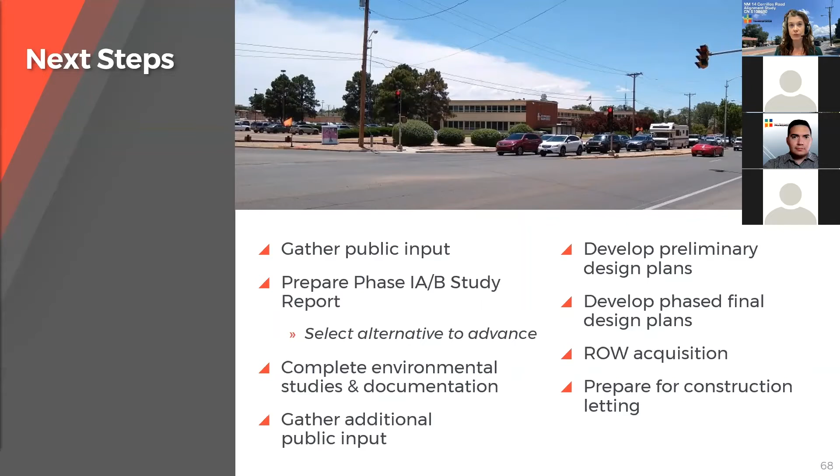We're then going to complete the environmental studies and documentation, develop preliminary design plans. We'll gather additional public input that will allow us to then develop final design plans. We'll also be identifying the right-of-way acquisition needs for the project, and then we'll be preparing the project for construction letting.

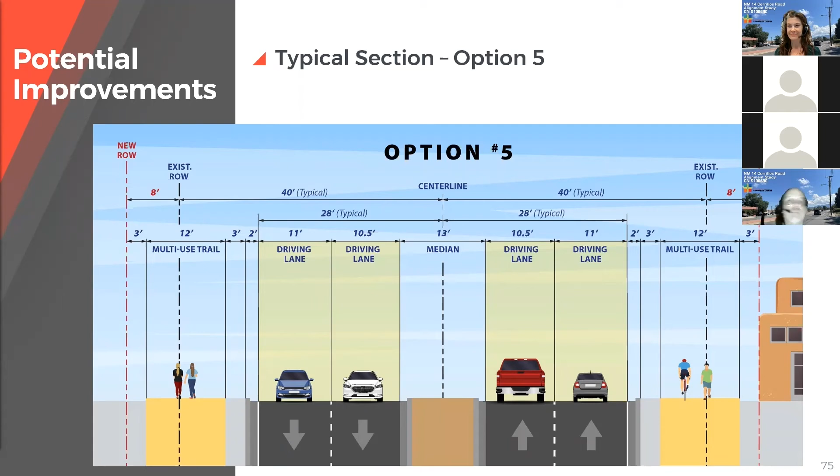So, okay, thanks, Jennifer. Yeah, thank you, Terry. That's helpful. And thank you, Hubert, for your questions and comments. From one of our online listeners, Marty, his question is, what are the acronyms SFMPO and WSP? What do they stand for?

That's a very good question. We at WSP get that question quite a lot. Actually, for WSP, the acronym stands for Williams Sale Partnership, which was the original name of the company a very, very long time ago in the 1900s, and they shortened it to WSP.

The SFMPO—I'm not sure where that appeared in our presentation. Can anyone on the team help answer that one? Jennifer, I think that might be SFMPO, the Metropolitan Planning Organization, Erick Aune's organization. That's a group that does medium and long range transportation planning for Santa Fe, actually the whole region. Eric would be better suited to answer, but I think that's my guess: Santa Fe Metropolitan Planning Organization.

Okay, thank you, Regina, that's helpful. A question from one of our online listeners, Sydney. Sydney asked, do you have pedestrian studies? It's a good question, Sydney.

Terry, would you be able to help us answer that question? Yeah, do we have pedestrian studies? We have some pedestrian data, some pedestrian information. We work closely with Erick Aune and the MPO in terms of the planning efforts for bikes and peds in this Santa Fe region, so we have access to pedestrian information, but our team didn't do any specific pedestrian studies as part of our scope.